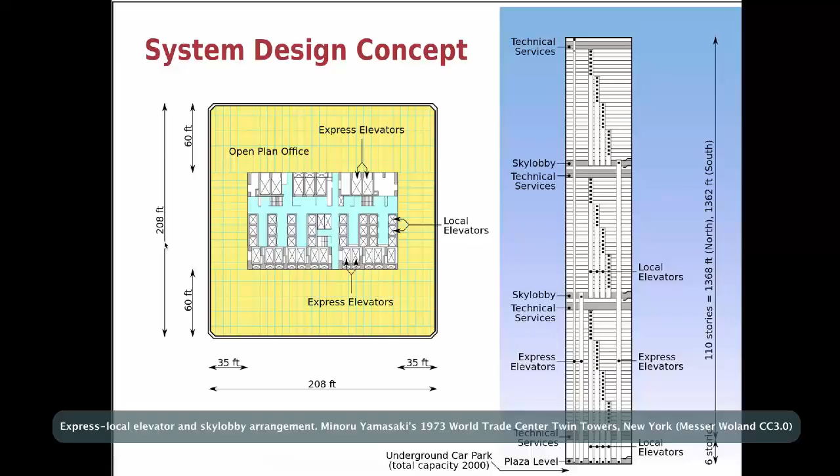By doing this with the elevators, they were able to open up the ground floor into this spacious experience. Yamasaki was influenced by the Gothic, and he was also afraid of heights.

So he put the structure on the outside, which, as those of you who've taken physics know—which is everyone, right?—relates to the moment of inertia formula: since radius is raised to the 3rd power, any material you put on the outer web of a structure is much more valuable in terms of structural integrity.

These things come together to create this outside skin structure, where the windows on the upper floors are limited to 18 inches wide. This was also done to prevent people from getting a sense of vertigo, another physiological human response to the architecture.

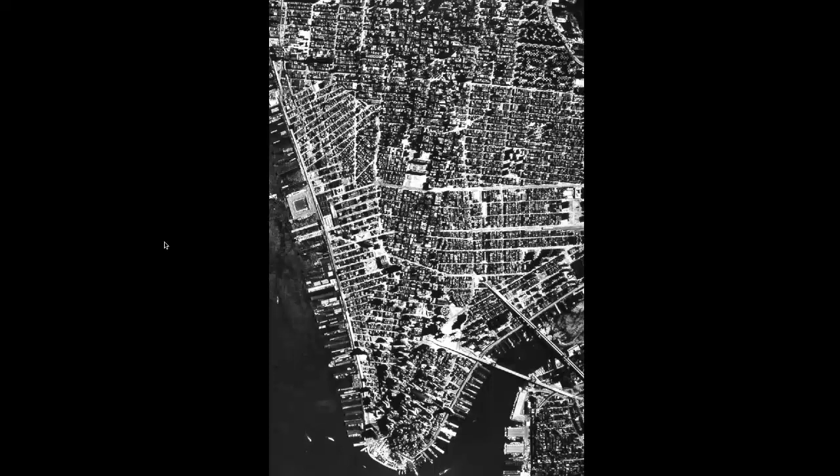This was Lower Manhattan prior to the project. It was conceived in the late 50s, early 60s. The commission was given to Minoru Yamasaki in the 60s, and he debated multiple different configurations, all coming out of the tradition of high-rise architectural design of the mid-20th century, which we'll cover in the prequel to this chapter next week.

This part of Manhattan was demolished. You see the block and lot structure of Manhattan—something we might cover in future weeks as we move back. This is a super block.

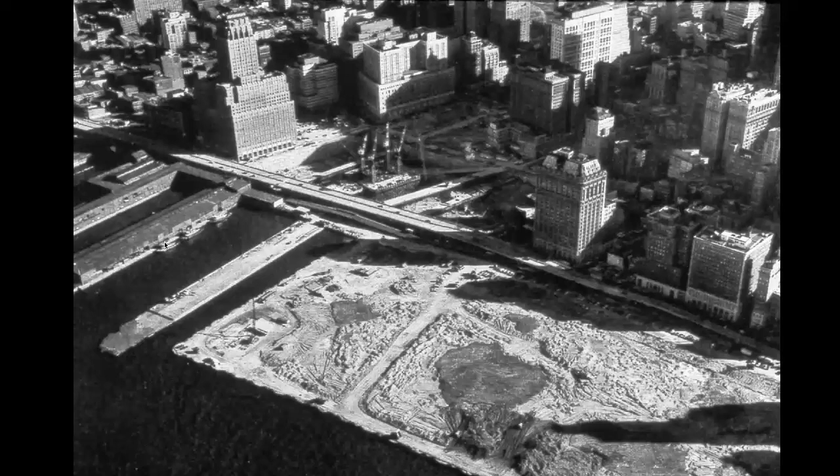It wasn't just this superblock, but also the land reclamation in the Hudson River across the West Side Highway in a development called Battery Park City. Here we see the landfill, the former piers. Earth is moved in, as we saw in Dubai with the creation of the islands, to create new parts of the city.

Here we see in the foreground this entire new extension of the urban fabric of Manhattan, built out in the 1980s in a postmodern architectural style, where basically a stripped-down modernist building gets a more expressive form, like a hat on top.

Some of the explicit references—here we get into Nelson Goodman's mode of meaning creation number 2—is Yamasaki reproducing prior architectures with a difference. He's making reference to each of these, changing it, incorporating and integrating it into his project. We're going to look at a few of those.

Ludwig Mies van der Rohe, one of the names on your sheet, is one of the grand masters of modern architecture—finally getting to the history of architecture that I recognize. He was a German architect, and one of his most beloved projects was this brick country house, where we see a very direct translation from abstract painting into the form of a building.

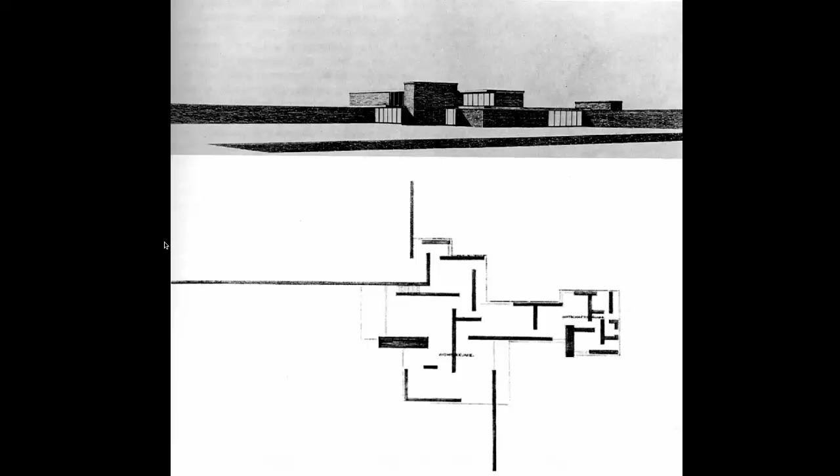You see these floating planes that still perform the functions of architecture because of the industrial technology of steel and glass. These technologies allow us to do more than simply punch holes in solid structural walls to create windows—this allows us to move structural loads. Again, here we're getting into physics: the steel in the roof allows us to transfer loads to these bearing walls in a way that allows entire stretches of the structure to remain open with glass.

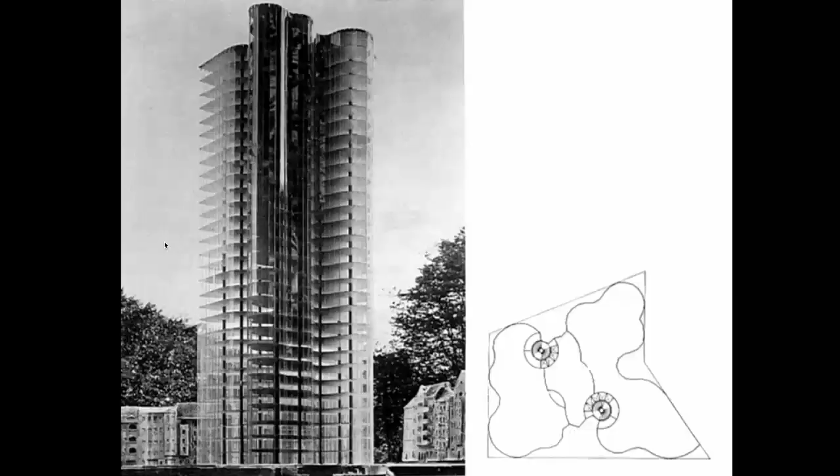Moving quickly to where this intersects with Yamasaki, Ludwig Mies van der Rohe comes into this discussion, primarily because he was one of the early experimenters of the implications of the glass and steel tower. It was these two theoretical projects where he immediately saw a problem with glass and steel buildings. If you hate glass and steel buildings, it's probably because of their tendency to appear absolutely rock solid, like a giant rock that is opaque when the light is reflecting off of it.

It's that reflective nature that many find extremely objectionable in these glass and steel towers. Well, right from the get-go, 1926, Mies van der Rohe is saying this is a problem. How do we address it? We curve the glass, to control the reflections and maintain the experience of transparency. This is a tangent, but the whole issue of transparency is a profound issue worthy of further exploration in electives dealing with painting and architecture, in this beautiful conversation that took place in the 20th century between architecture and fine arts.

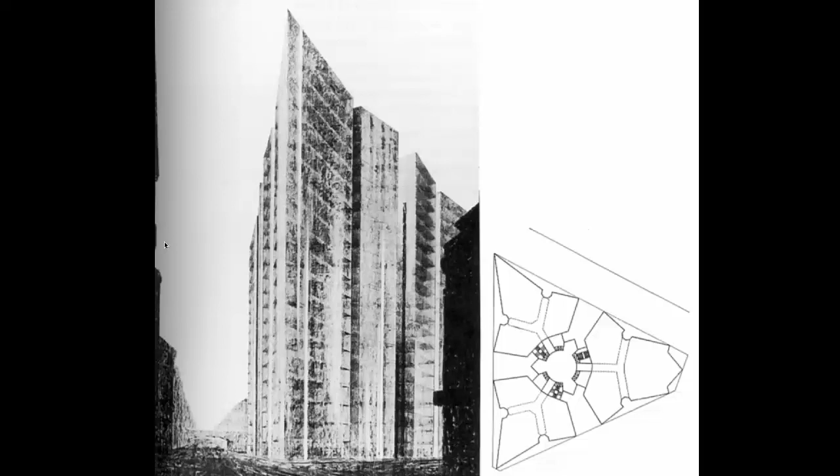Another strategy incorporates plain sheets of glass, less effective because of the physics of the optics of glass. This will create reflections, but because of the faceted nature, only one or another of these facets will be generating reflections at any given time. The rest will appear to be transparent. Now, these lessons of 1926 get forgotten by everyone, including Mies.

In 1957, the Seagram Tower, which he collaborates with Philip Johnson on, he goes flat. There are two big reasons to think of this building. Since we're flying through this quickly, I'll just say it: the ideological commitment to the honest expression of structural systems is at the core of the rationalist instinct of modern architecture. So we get a very clear, expressive element on the facade of the Seagram Tower in these I-beam sections.

But it turns out that it's decoration. It's very disappointing to understand that the fire codes of the day, and still today, require that all structural steel be encased in fire protection — in this case, concrete. If it were actually carrying the loads of the building, it would have to be encased. So you have the real steel here, and then you get the decorative steel there. It's one of those paradoxes of modern expression.

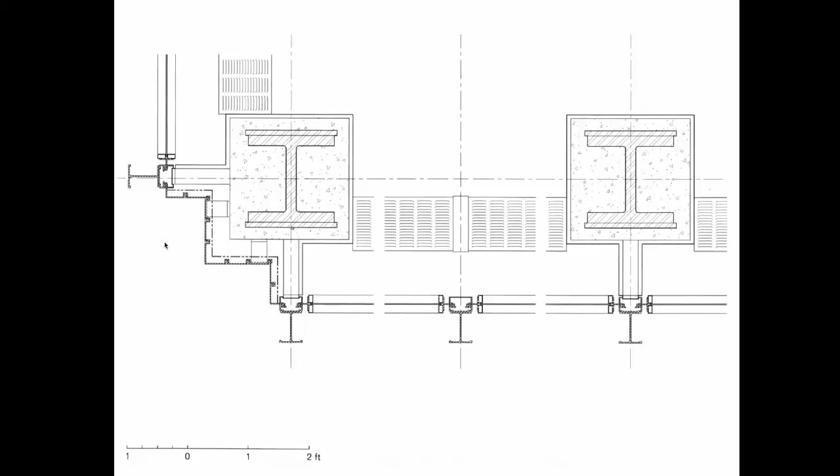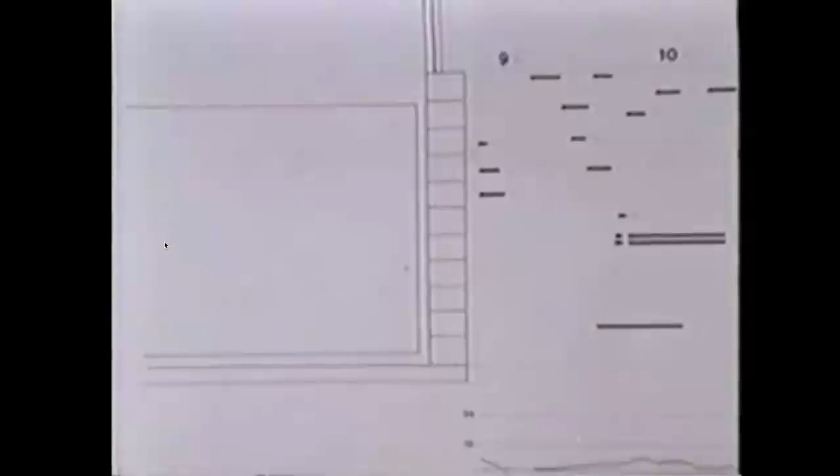This is a famous detail from the Seagram building. Notice the very heavy cornerturn, but notice also something remarkable. This is the other thing that makes the Seagram building famous: the plaza in front of it, which became the focus of study by William Hollingsworth Whyte in his 1980 work, The Social Life of Small Urban Spaces, where he uses techniques not so unrelated to what we're doing to study how the formal spatial arrangement of the plaza exemplifies a situation that creates a condition inspiring a predictable and specific response in human occupants, in terms of sunlight and social interaction.

Another precedent is Rockefeller Center, similar in that the buildings themselves are of great interest. Raymond Hood's 30 Rockefeller Center is a famous building, beautifully detailed with Art Deco sculptures. But more than anything else, it's the public space framed by these buildings that has the most profound impact on cities throughout the world to this day. This is one of the most common points of reference for new designs worldwide.

It somehow miraculously guides us from Fifth Avenue down a gradual ramp, using an idea from Beaux-Arts design, very gradual and almost imperceptible, leading us down to a sunken plaza where the ice rink is. How many people have skated there? Great, so you know what I mean. And thus it seemed to make the world safe for sunken plazas.

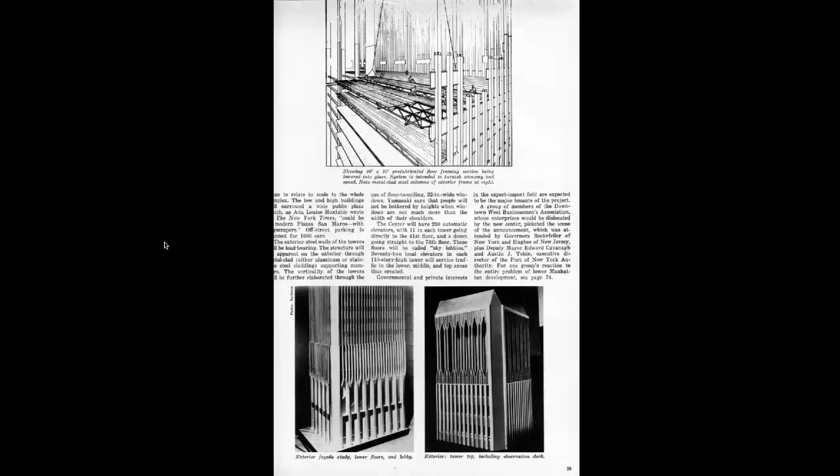The tradition of expressive tops is rejected by Yamasaki in favor of a pure modernist form. It joins with the sky. It was very strongly ideologically driven. During the construction, we see this statement. And again, we see this issue.

There's the form of the building, which is the thing that seems to be most obvious, that people pay attention to. It's the tallest, it's the biggest. But then there's the space between the buildings and the space on the ground that is powerfully influenced by the building itself. In this case, again, getting to the physics of the world, the wind blowing between the towers required ropes to be set up on the plaza in some conditions so that people would not get blown off their feet as they tried to enter the building.

It was very dramatic. One of the things that the World Trade Center ushered in was the death of the steel industry in the United States. But wait a minute, that doesn't make sense. This building took enormous amounts of steel. Why would it lead to the death of the steel industry? Well, the granddaddy monopoly of all steel companies in North America was Bethlehem Steel, based in Bethlehem, Pennsylvania.

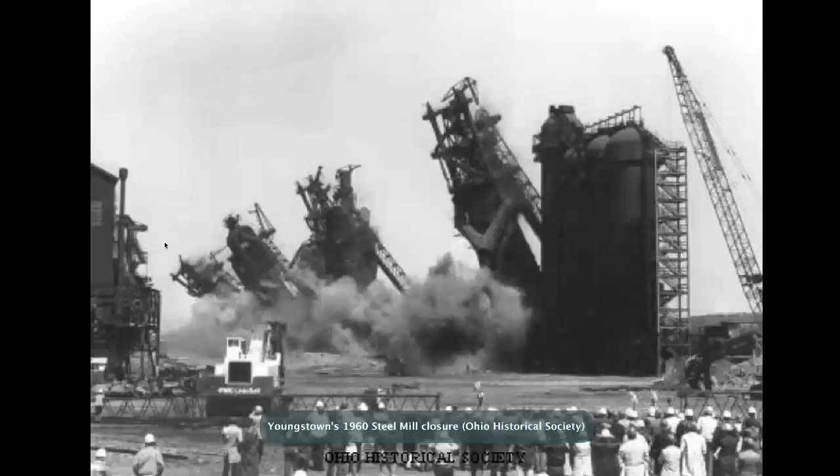And they innovated by controlling the entirety of the production cycle, from the mines in Cuba to the railway companies to the storage facilities to the shipyards. And they are one of the big reasons that the U.S. and the Allied forces were victorious in World War II, because of the miraculous production of steel and the products of machinery and warfare that came after.

But the competition from smaller so-called micro steel plants and then the steel coming from Japan and Korea and now today China, hopefully we'll get to China, led to the bankruptcy and closure of steel plants. And in 1995, the Sands Casino took over the Bethlehem Steel yards and reused it as a casino, hotel resort, planting the seed for our focus in Singapore. Still, the iconic skyline becomes important in Las Vegas, and it becomes important for reason number 4.

Architecture has a way of hosting events in history that transcend their architectural intentions. Or is that completely true? Why was this the target? The 9/11 plotters were planning students in Hamburg. They had an awareness of design of space, but it didn't take a planning student to figure out that if you wanted to attack a symbol of power, this is a likely target.

And so the exemplification of the Twin Towers was designed to inspire a specific reaction, namely this one: ah, right? It was designed to create that moment in people who come upon it. And that experience of, oh, is followed by, wow, the US is a big deal. Wall Street is a big deal. And so the events of history are actually connected with that act of exemplification that was always the intention of Yamasaki.

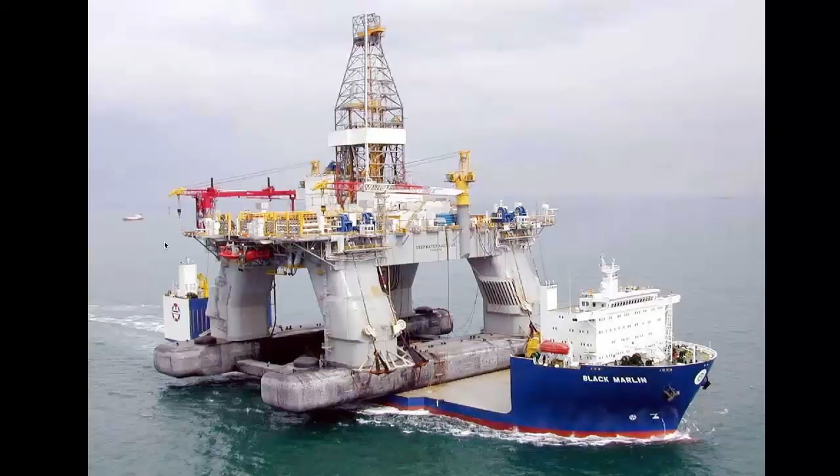And here's architecture with a small a. There is a large amount of human effort devoted to increasingly large-scale extractions, which ties in with the demographic explosion that we looked at last week. If not for these extraordinary means taken to accelerate the process of extraction, we would have overrun our capacity to survive without resource wars long ago. Do we have resource wars? All the time, every day. But they are cute compared to what would be the case if we hadn't done such an extraordinary job accelerating our capacity to extract the assets of the limited planet much faster than anyone ever expected.

The reason the Deepwater Horizon attracts our interest is because, or so I thought, it would be so well documented. But unfortunately, as is also true at the World Trade Center, all I get are balls of flame. And I'm not interested in balls of flame pictures. So this is the only ball of flame picture we're going to see of this. We only got one ball of flame with the Twin Towers. We only get one here.

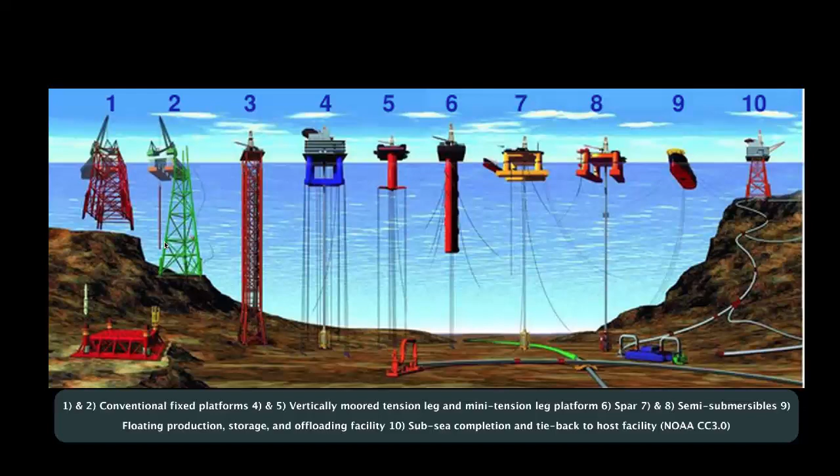So the architecture of the drilling platform has evolved quickly and dramatically to the floating platform number 7, which is the type of the Deepwater Horizon. It was drilling at the time of the explosion in 2010. It was drilling in about a mile depth of water and went down another 30,000 feet, so for a total of something like 7 miles, making it arguably the tallest structure in the world, if you count from drill bit to top of the rig.

It's really a remarkable, bold adventure to drill like that, and it gets replicated in a way that does transform the landscape, not just on land, as we see in this fracking map in North Dakota, but also of the planet's oceans. And so to an increasing extent, our ability to maintain the whole thing, to keep it going and keep it from collapsing, depends on this extraordinary effort to extract commodities out of the landscape. And it's a very intense process wherever it occurs, and it's also very extensive. It's both intensive and extensive, as you see in landscapes like this.

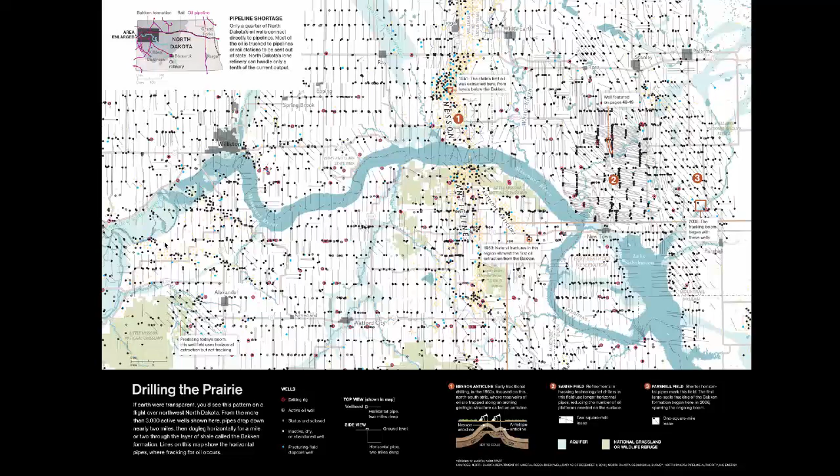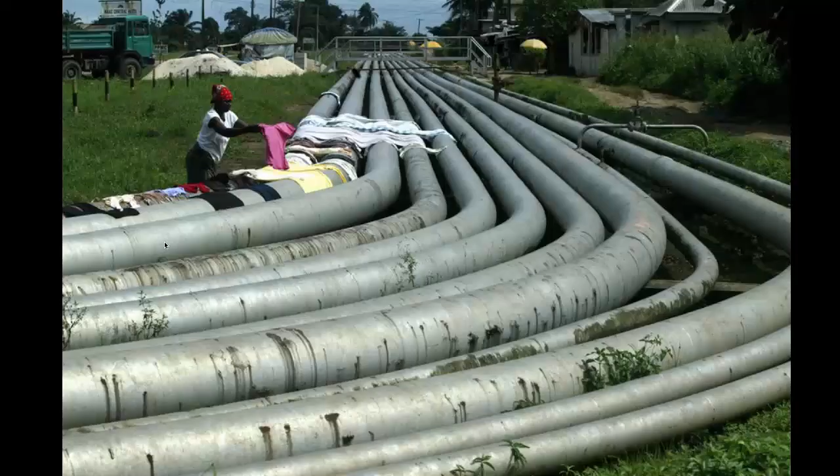Horizontal drilling technologies where you can send a drill bit down and then curve it to run it horizontally under other people's mineral rights is a physical trick that has legal and economic implications. So you don't have to own the mineral rights of a property. You can drill into it from several miles away and come at it from the side, which allows a much more focused concentration of extraction efforts, which quickly brings us to Africa. The forces of history, one of the biggest forces of history, and this is not new at all. This is one of the oldest games in town.

Extraction. Some historians have classified all human societies throughout history as either inclusive or extractive. The inclusive societies tend to be agricultural, everybody's a producer, or the productive capacity of a society is distributed. It depends on many, many small players, and this is the geometry that Adam Smith preferred in his theorization of capitalism. When it comes to minerals and other valuable commodities that are at the key of keeping this whole thing running, from our phones to our jets and our cars, is the concentration of extractive efforts in the hands of very few owners.

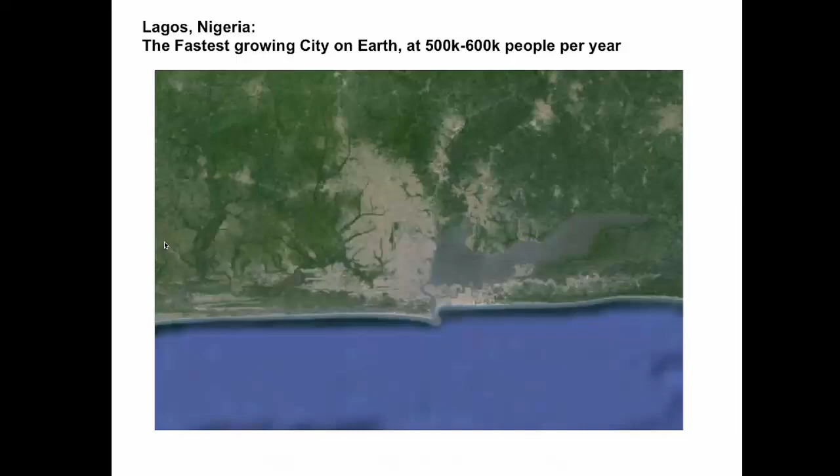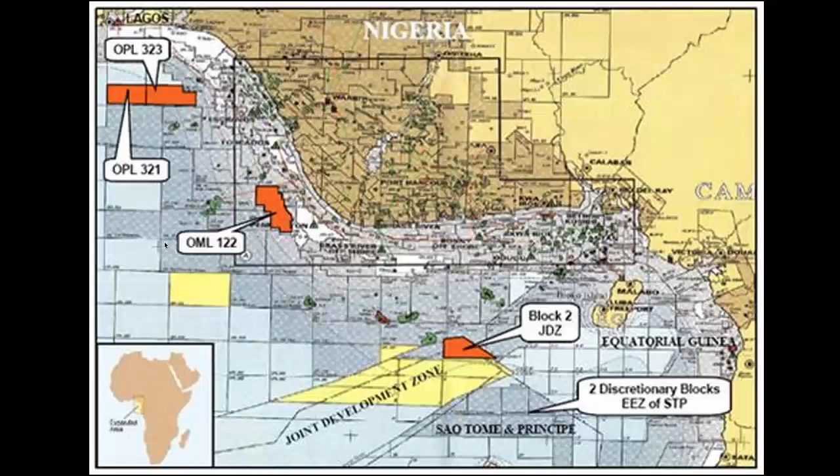And so this, I'm afraid, is one of the more depressing aspects of human history, is that we repeatedly encounter these extractive strategies and these extractive endeavors that concentrate power, wealth in the hands of very few, while the vast majority of these societies not only do not gain benefits from this great wealth, but they're actually thrown into a reverse direction in terms of whatever human progress was made in some of these societies over the centuries. They get thrown back into these feudal social structures. And this has become an infamous aspect of especially Africa.

We're going to talk about China shortly, but as much as China is transforming the world and Africa is not, that is going to change. And it turns out that the combination of Africa and China is really the biggest game in town for the next century. So the colonial partition of Africa into nation states was a disastrous handicap for the 20th century up to the present, and many people believe that the genocide of Rwanda and multiple other conflicts to a large extent emerged directly out of that structural condition of nation states that are composed of constantly or consistently warring factions of subnational identities.

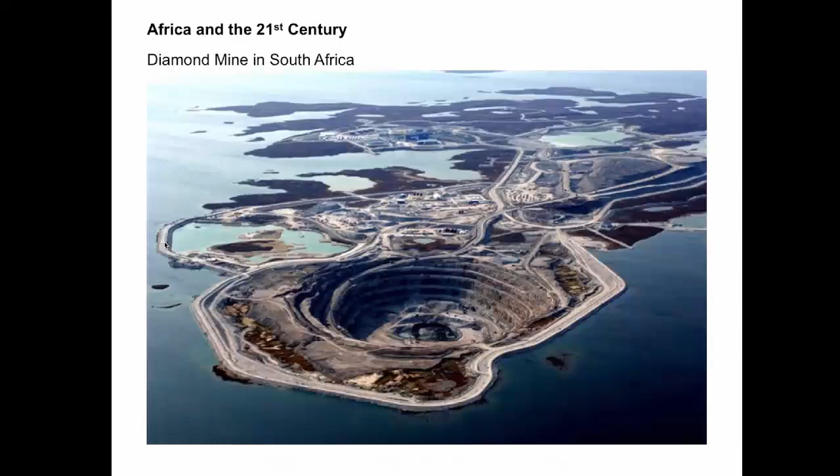And so when you throw into that social mix commodities, discoveries of extreme high value, it just throws jet fuel onto the already smoldering fires of ethnic tensions. And so this concentration of wealth very quickly deteriorates socially, usually with not just the commercial side, the economic side of extraction, but also the political side of extraction, to the point where many historians look at those two things together in a political economy analysis of these situations. And so it's not crazy to consider Bilbao, the Guggenheim Museum, as a candidate for talking about this larger system. The titanium of the skin of the Bilbao Museum by Frank Gehry, 1997.

By the way, the other place this story comes into play is in talking about Medellin. The mythology of Medellin, the one that I'm trying to correct, is that architecture saved the city. Nothing could be further from the truth. The social transformation programs of Mayor Sergio Fajardo saved the city. Architecture played an important role in convincing people that the government was serious about investing in schools and opportunity and law enforcement. And so architecture played a crucial role, but don't expect that building library parks in Mexico City will solve the drug problems there, or Honduras. It takes so much more than that. You might not be able to do it without the architecture. You might be able to do it better with architecture.

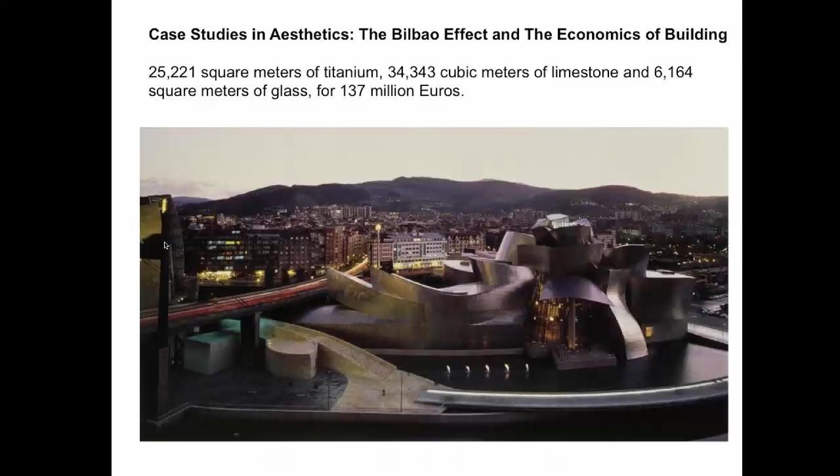That is, just because it's wrong doesn't mean that it hasn't become a focus of city efforts all over the world, which it has, under the name of the Bilbao Effect. So that's the other reason this building is worth looking at. But right now we're just going to quickly look at what it takes to produce that titanium.

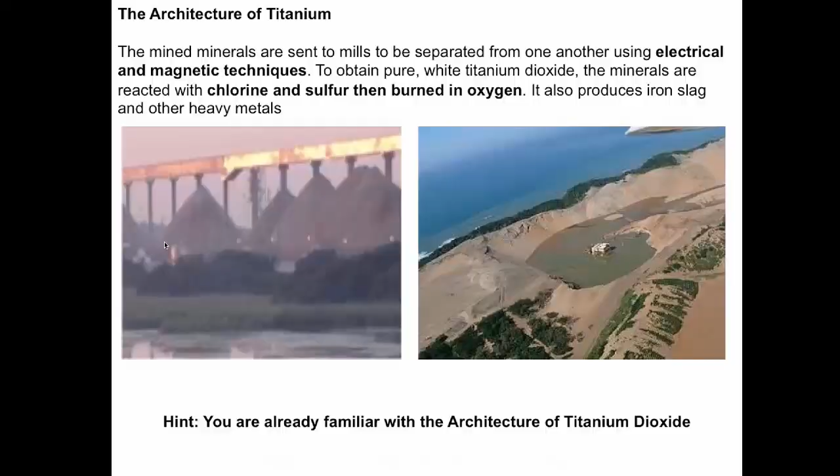My partner in much of this project is Patrick Hoya, graduate of the program here. He and I taught together about 7 years ago for several years, and we continue to collaborate. He, more than anyone else I know, is adamant that mining is very much at the core of architectural history. So some of these slides are from him, where he talks about how architecture doesn't just appear from nowhere, it comes from a hole in the ground.

And the impact of something like the Twin Towers or Bilbao is felt all over the world in open pit mines, in the labor camps, in the broken families, in the dislocation of families, of whole communities, in the name of resource extraction. And so it's not crazy to see this as a larger system, which is what we're floating in this course, is that these architectures are connected to these larger systems, that there is an architecture of extraction that transforms the built environment, the natural environment, and ultimately the planet.

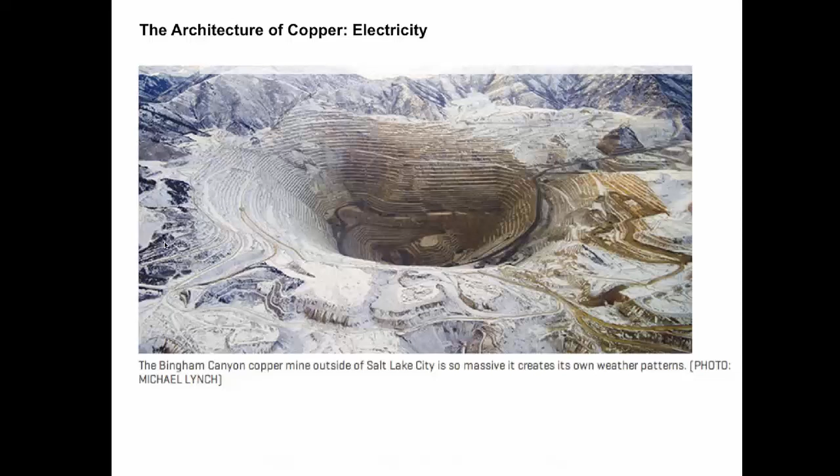How many of us have been to Singapore? How many of us are from Singapore? No one's from Singapore. Okay, but been to Singapore. Singapore is amazing. What can I say? Any way you measure it, Singapore. Just amazing. Look at that.

Remarkable. Architect Moshe Safdie from down the road here. Brilliant architect. One of the star-architects of the Bilbao Effect. He is called in to the city of Singapore to produce something that the world has never seen. Just like the Burj Khalifa, the World Trade Center, many of the projects we're going to see in China, the goal was to inspire those who come anywhere near this to go, oh.

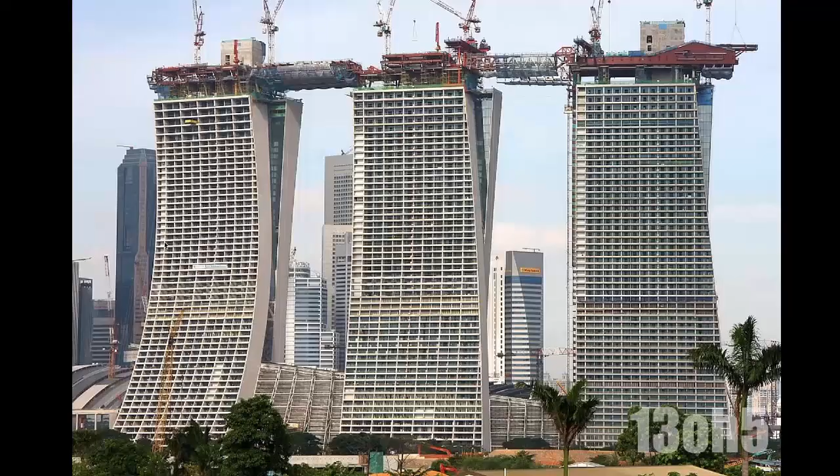And there's something magical about making people feel that changes them. This is exemplification of the most raw primal type, where your breath is simply taken away. So I could list all the amazing firsts and largest and longest and most water, highest in the sky, but just take it all for granted that it's just the most expensive building ever per square foot. It is that. The most water, highest up in the sky.

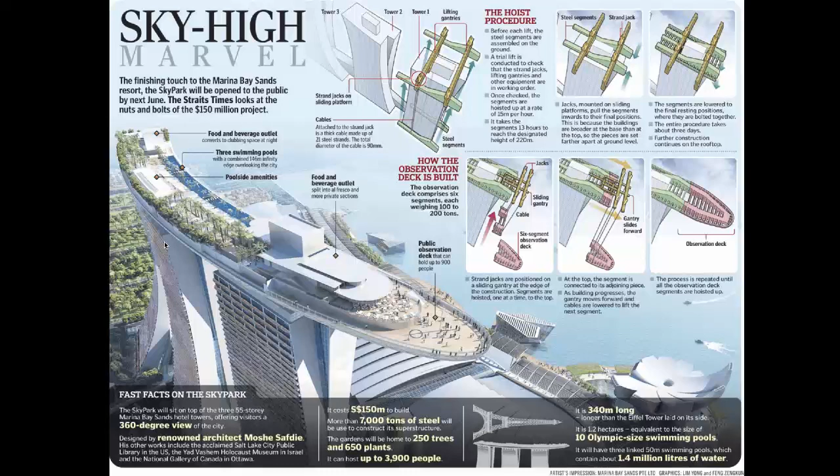Some of the tricks of how they did it, so the cantilever alone was an extraordinary accomplishment. And then there's the sound and light show that goes with it, because like the Burj Khalifa with the fireworks that we saw, there is also this remarkable fountain light projection thing going on that, what can I say? You look at enough of these and you start to, what fun, first of all. But also, what a remarkable investment.

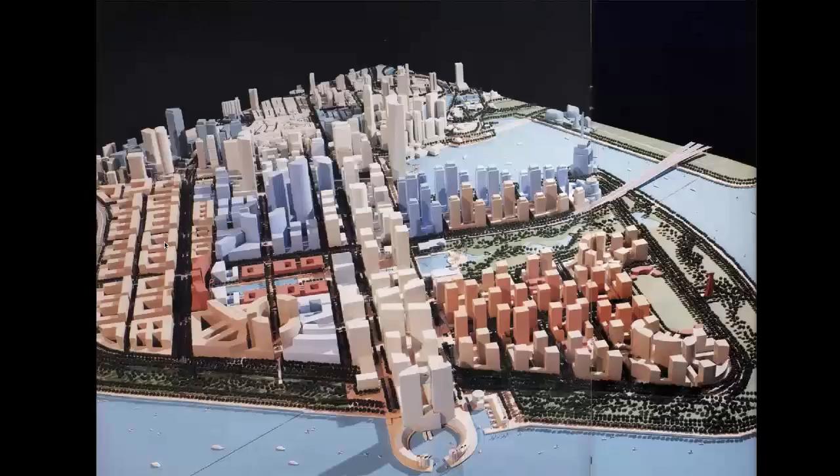And what are they thinking? What are the designers, what are the builders thinking? Well, they're thinking the same thing that they were thinking in the Burj Khalifa. They were thinking, how can we become the most, the biggest, we're not going to get the tallest building here, but let's get the coolest experience. It's not just to generate tourism dollars. And this is a question that will go into the China topic a few minutes from now.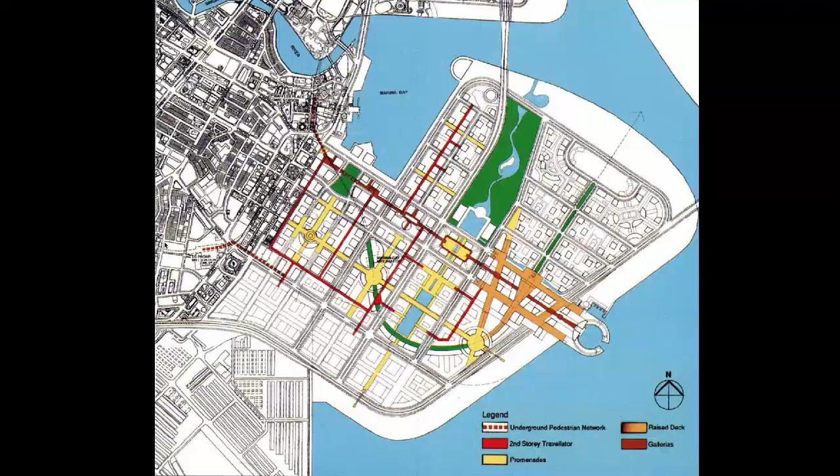But here's the landfill, another, like Battery Park City, downtown Singapore, in order to expand, engages in a massive land reclamation effort. Dubai is bigger, but this is, I believe, a close second, where they're expanding the downtown area in this entire new extension of the city.

Singapore does what we wish everyone did. They look at history. They look at who has faced this before and how did they face it. And did they do a good job? Where did they succeed and where did they fail? Why did they fail? What can we change to succeed where everyone else failed? This is the commitment of Singapore.

This is what they do, and they do it better than anybody has ever done it. I'm going to be so bold as to say that. It is remarkable. And so they have one of the best transportation systems in the world, not because they have good trains, but because the trains and buses are integrated with the land use patterns of the new city.

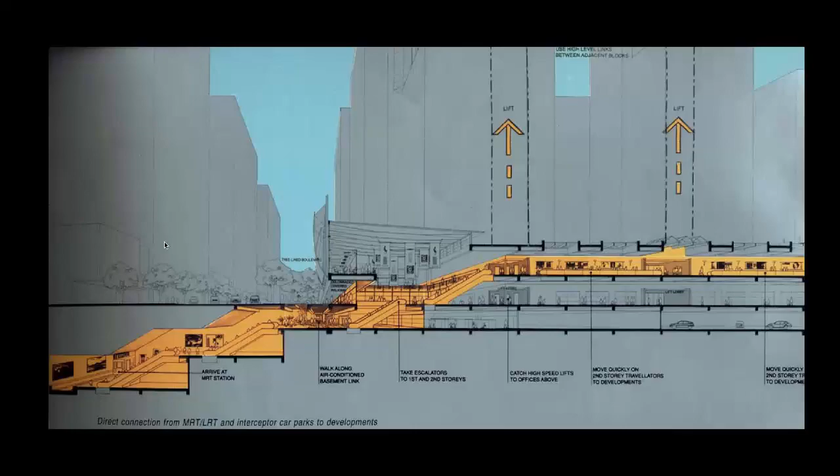So when they extended the downtown area, the challenge was they already had all these subways. How do you extend that subway capacity downtown in the new extension of downtown without building whole new subway systems? Well, they do it by taking extraordinary measures of interconnected walkways that are cooled. And why? What is going on here?

Going way back in history, Singapore was a British colony for the transfer of goods. This was the port, very dirty, but very effective. Moving very quickly, the British gave independence to Malaysia and Singapore, which was all part of the British colony of Malaysia, in 1963. And immediately there were ethnic tensions, like in Africa, between the native Malays, the Bumiputra,

which is Malay for the children of the earth, the Bumiputra Malays, with a long history of indigenous occupation of this land, and the relative newcomers of the Chinese. The Chinese had only been there for 1,000 or 2,000 years, and so they were the newcomers. There's something about the ethnic divisions of this part of the world that does not allow those divisions to soften over the centuries, despite linguistics, despite intermarriage.

And so violent riots occurred between the Malays and the Chinese. And Malaysia's response was, for the first time I can think of, certainly in modern history, a nation state of Malaysia said, you know what? We're done with you, Singapore. You are out. We are kicking you out of the country. So Singapore did not seek its independence. It did not win its independence.

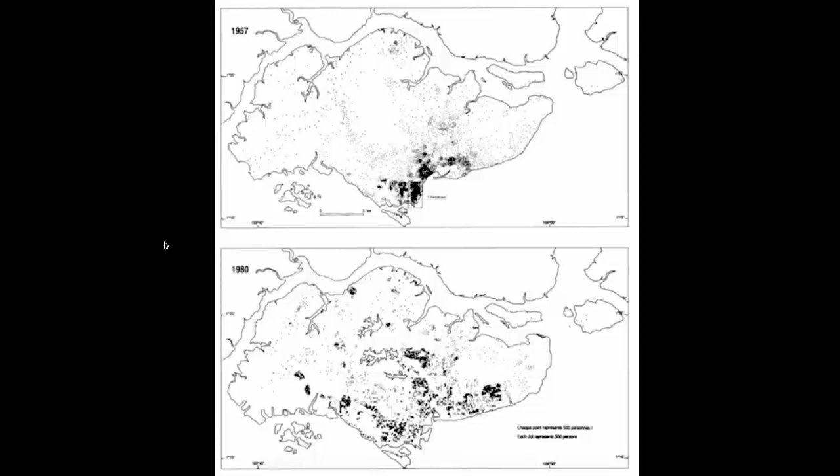They took those ideas and they looked at what worked and didn't work. And so Singapore is the place that breaks the rules of our assumptions of history that modern urbanism was a disaster. They make it work, and it's actually quite wonderful. In the 70s, they aggressively relocate people. They bulldoze the overcrowded inner city. They move people out, and they put in buses, roads, and finally the heavy rail system.

And they do it in a way that people can walk from where they live to the nearest subway stop. They give people these modern buildings that they are thrilled to be in. It is a transformation. It's a social transformation. We'll talk about this a couple times in this course. The issue of whether you can improve people's conditions by giving them better housing. And the conventional wisdom now is no, forget about the housing for many reasons that maybe we'll have time to get into in the future.

But in Singapore, and typical of the Singaporeans, they prove that wrong. They put people in these houses and their lives are transformed for the better. And this is what the key issue in Singapore is. They create a social package. They create housing, public housing, that up until recently, 87% of the population live in public housing.

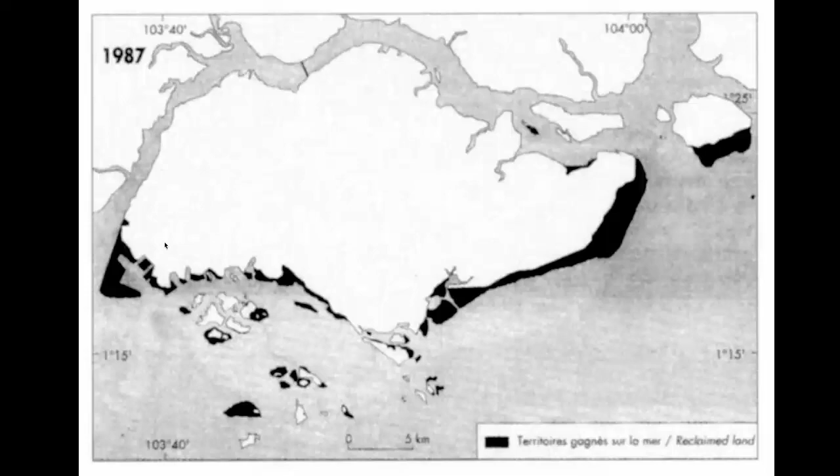They pay low rents. Their employers are forced to pay into their provident fund that they can't touch except for housing, but it's for retirement and college. They transform the waterfront with a new port, which becomes one of the largest in the world.

The series of projects, including they establish a national airline, Singapore Airlines. They blow the competition out of the water based on the character of the all-women flight crews, and set the standard that Dubai is still emulating with their national airlines, this move by Singapore.

They do a tremendous job with the urban fabric with these natural and man-made canopies. It's right smack dab on the equator. Nothing is hotter, but it's not bad walking around because they saved these elements. They did not fill their tower blocks with parking lots. They filled it with gardens and social space for collective gatherings. They created ethnic mixing and social mixing in their towers.

They also give all kinds of tax incentives to live with or in the same building as your parents. So they try to keep families together. For a while, they gave you tax credit if you didn't have children. And then they switched that. They give you tax credit if you don't have children still, unless you have a college degree. And if you have a college degree, then please have children. So there's a very extreme social engineering. Why? Because they were going to die. They were going to collapse into nothing.

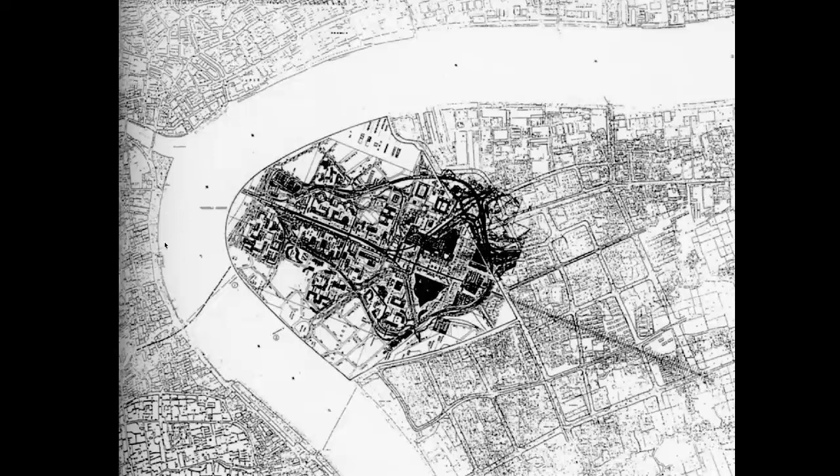And what do they do? They use Nelson Goodman's number 2. They take La Défense, and they said, what if we built La Défense? And so they tried that out in Pudong. Then they said, what if we took this other part of Paris and we put it there? And there it is, standing in for the Oriental Pearl. Lots of Eiffel Tower stuff going on in China.

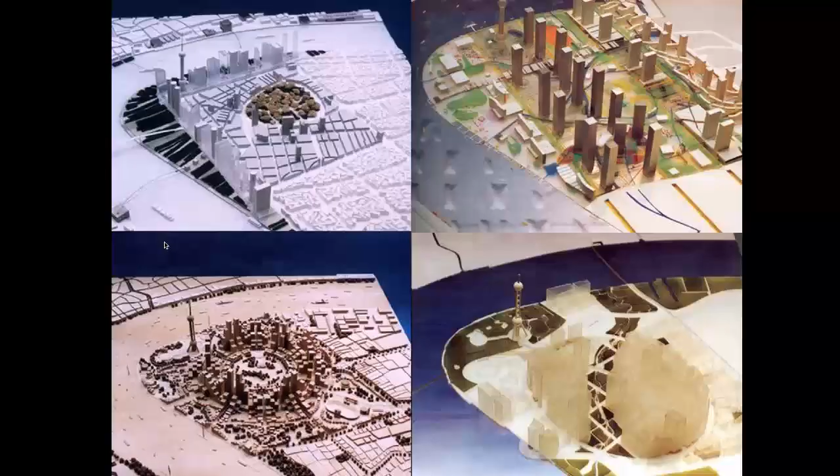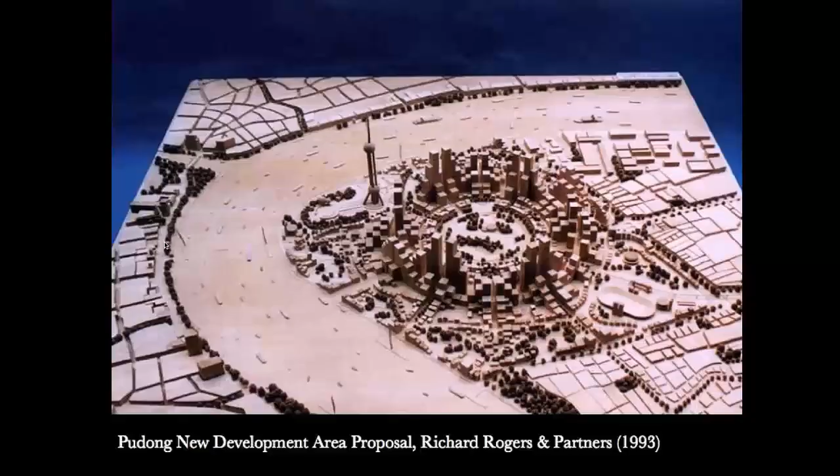Then, what if we put Venice there? And so they're very directly in this competition testing out the power of reproducing something known with a change, with a difference. And so here is the range of entries by the star architects for Pudong in the 1993 competition.

Who should win? Surprise, surprise, the local Shanghai Urban Planning Institute wins the competition. They take the ideas of the star architects, they incorporate it into their own design, and Pudong grows up around the Oriental Pearl.

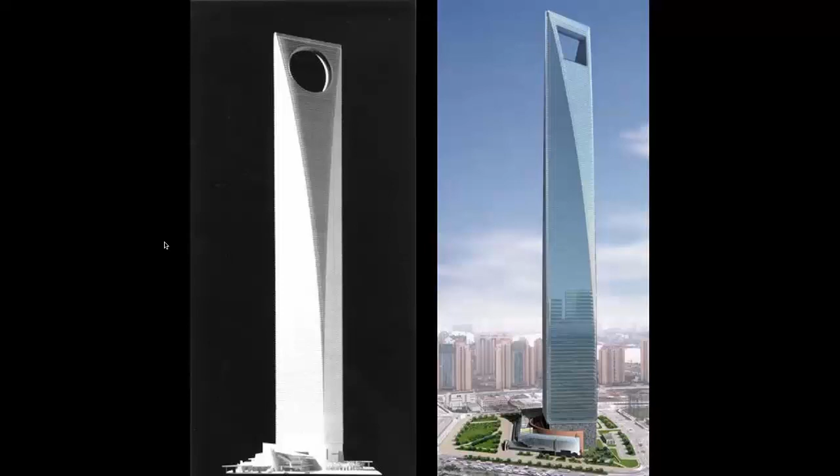Using a lot of the elements they stole from the foreign star architects' entries, and through the invitation of world-famous firms like Skidmore, Owings and Merrill. Here, the historic Pagoda Tower is the source of the Jinmao Tower.

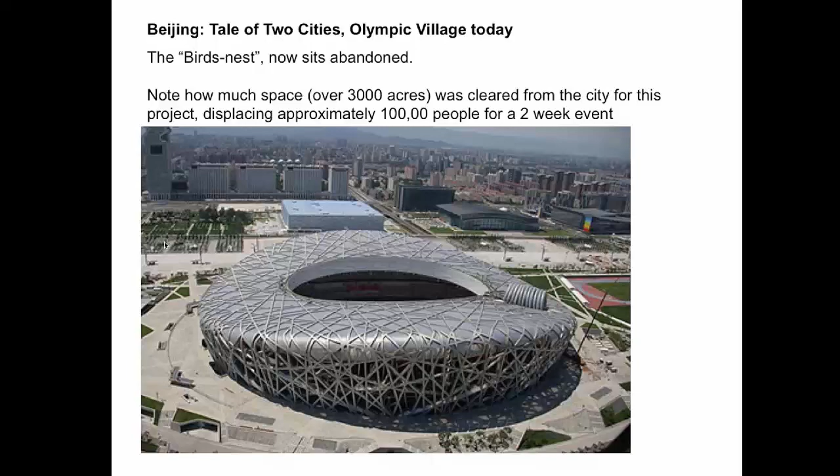Here, the circle was too reminiscent of the Japanese flag, and so they had to quickly scramble and change it at the last second. Then they followed up with multiple mega projects, including the Olympics in 2008, where we have the spectacular star architecture of the bird's nest, and then we have the human model, the extravaganza. The equivalent of the Burj Khalifa fireworks is the opening ceremony of the 2008 Olympics, and then a regular clip of other things.

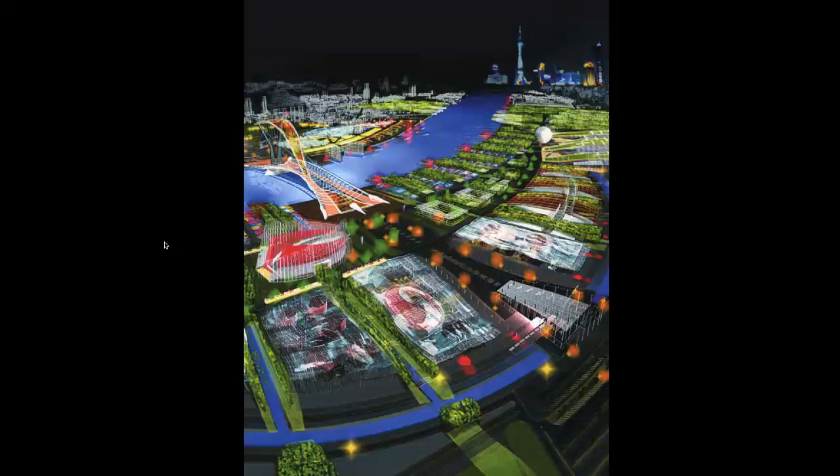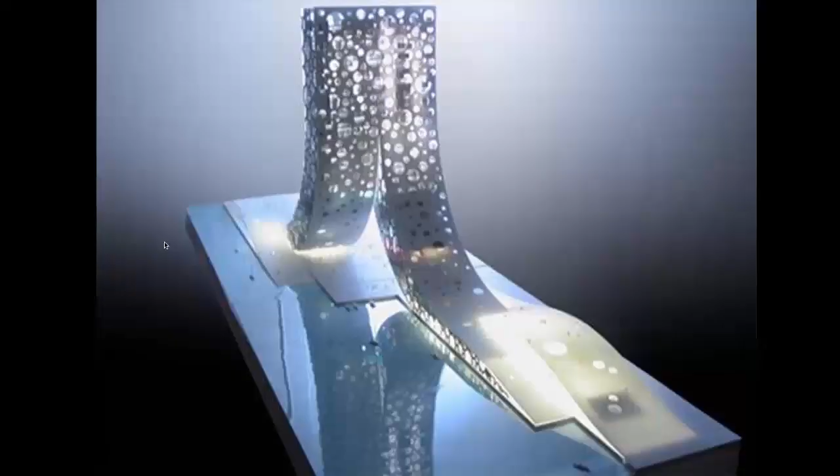The next thing was the World Exposition in 2010, where one over-the-top architecture after another is paraded in these fairgrounds. This is one of my, I hate this example, but it's a very powerful example of denotation. The figure for human takes the form of the building itself, resulting in what I would imagine to be a horrible experience, but a powerful example of denotation in the spirit of Nelson Goodman's four principles.

So the next big thing that happens is in 2012, China announces the next great leap forward, which is not necessarily a good thing given the history of the last great leap forward, the death and destruction in the wake of that. So the great leap forward of urbanization.

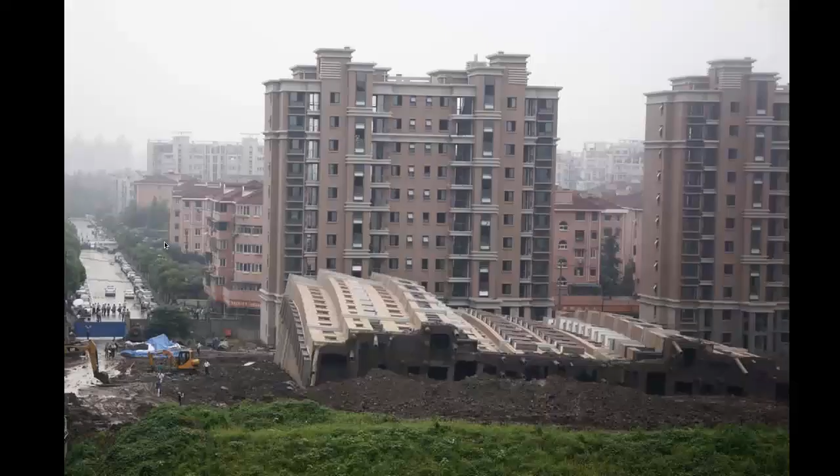They say, we are going to move, willingly or not, 250 million people from the countryside to cities. And we're going to do it in 12 to 15 years. So breakneck pace of construction, of dislocation.

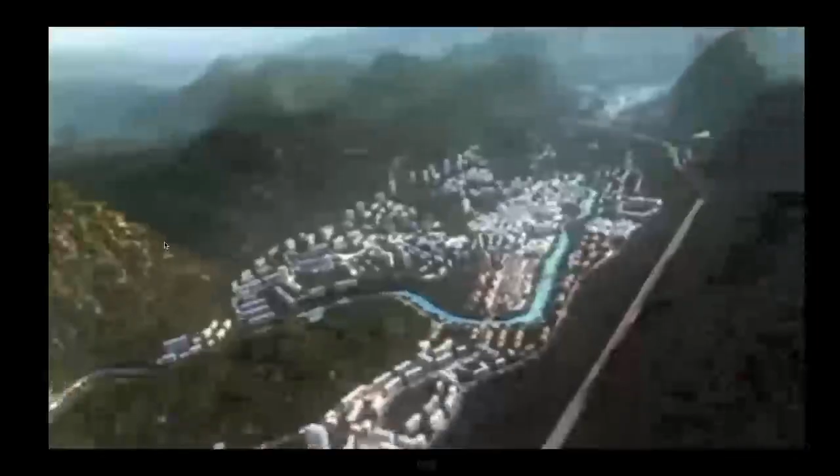Despite all the building of luxury condo towers, this is a typical arrangement even before. Here's one visualization of the new city at Whitehorse. The village of Whitehorse is being transformed into this city. And this is replicated multiple times.

The New York Times has a fantastic visualization that gives you a gut sense of how many people, they compare how many cities, Paris, London, New York, you'd have to gather together to make up 250 million people.

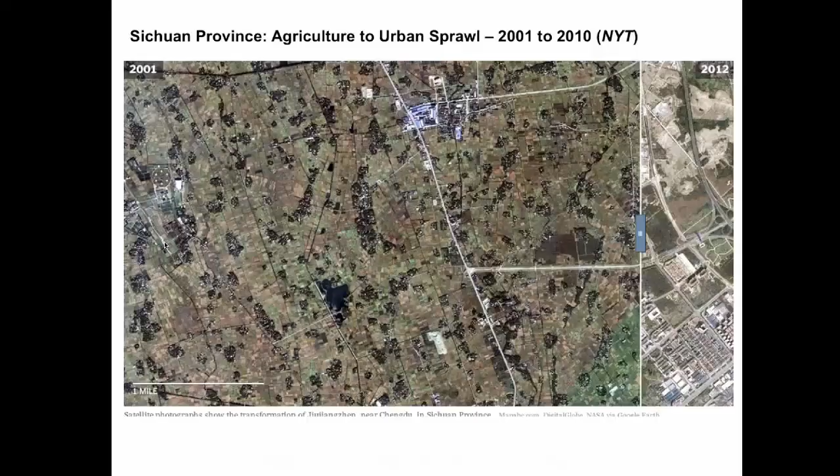And so here's another way of looking at the rapid transformation. And here's another way. In 9 years' time, this is what happens to this farmland.

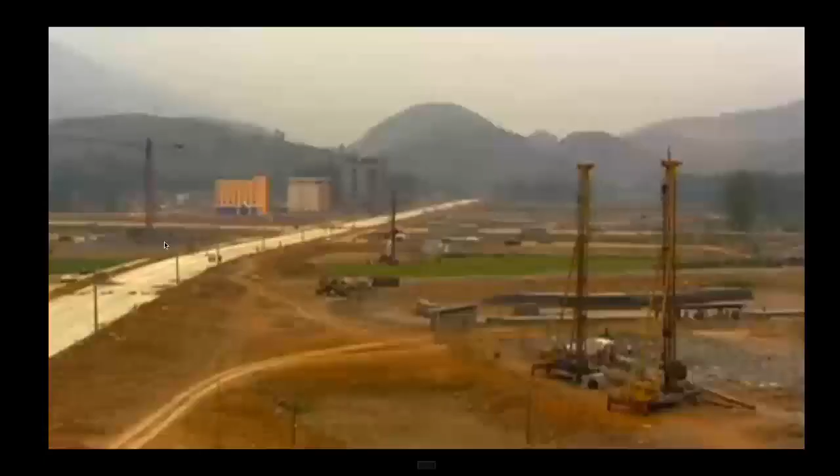The dislocation is extremely difficult. All throughout China, these negotiations are going on where the government official, without any real recourse, is negotiating with the people for their land.

And this is what happens very quickly. This is BBC sponsored. And we're out of time.